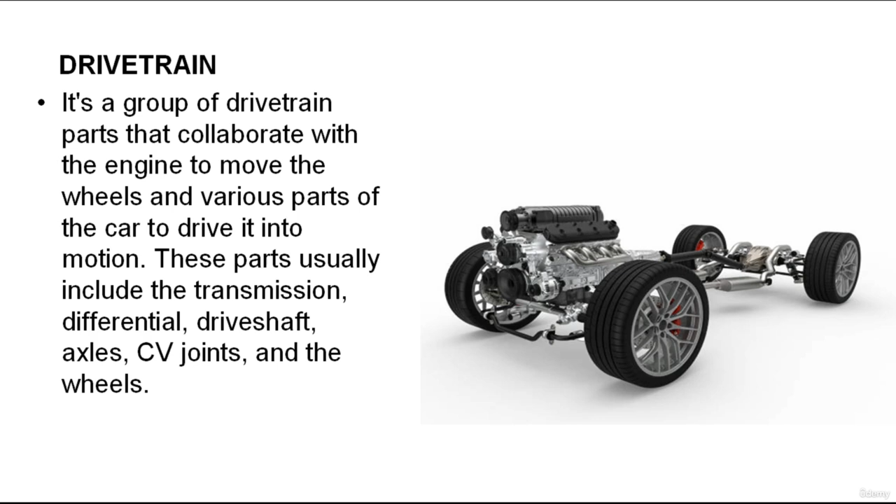Power flow in a rear-wheel drive vehicle passes through the clutch or torque converter, manual or automatic transmission, and the drive line. Then it goes through the rear differential and the rear driving axles and into the rear wheels.

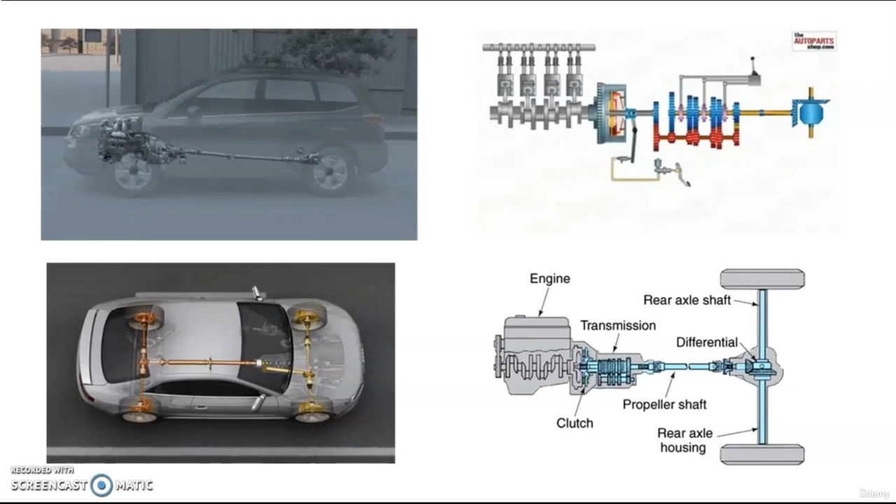Power flow through the drivetrain of front-wheel drive vehicles passes through the clutch or torque converter, then moves through a front differential, the driving axle, and into the front wheels.

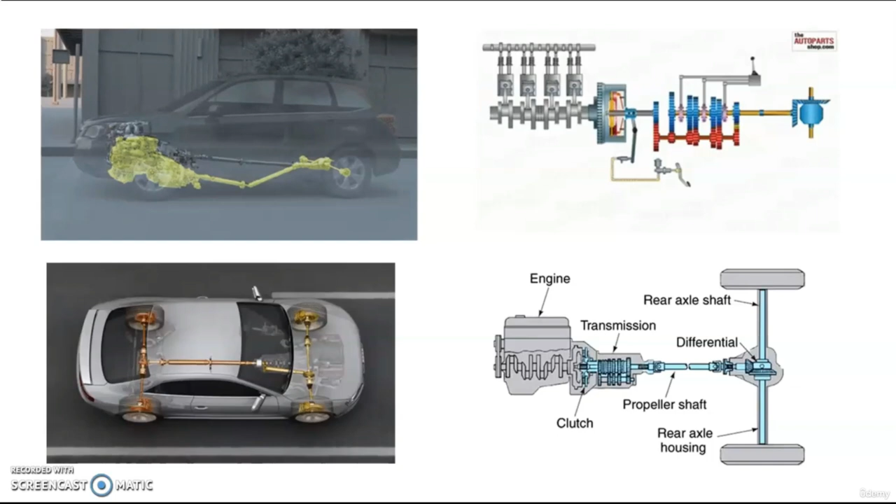Four-wheel drive or all-wheel drive vehicles combine features of both rear and front-wheel drive systems so that power can be delivered to all wheels, either on a permanent or on-demand basis.

Typically, if a truck, pickup, or SUV has four-wheel drive, the system is based on a rear-wheel drive and a front drive axle is added. When a car has all-wheel drive or four-wheel drive, the drivetrain is a modified front-wheel drive system. The modification includes a rear drive axle and an assembly that transfers some of the power to the rear axle.

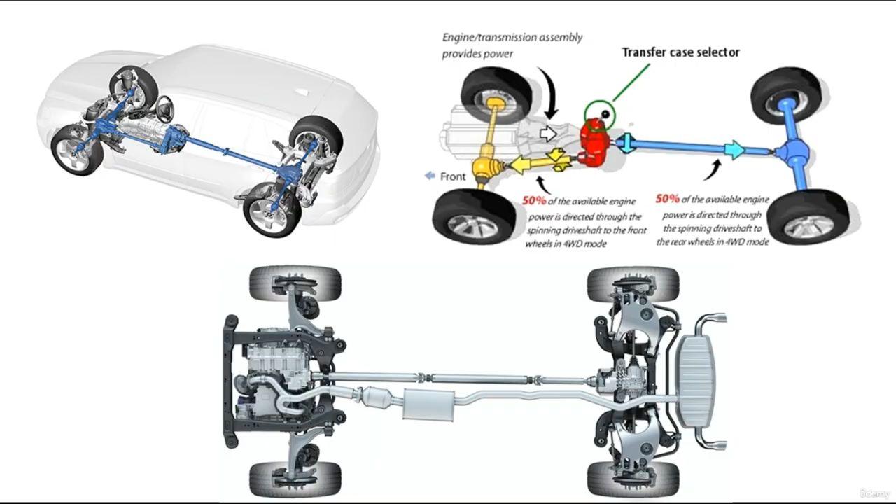We'll start with the first component, which is the clutch. The clutch is used with manual transmissions and transaxles. It mechanically connects the engine's flywheel to the transmission or transaxle input shaft. This is accomplished by a special friction plate that is splined to the input shaft of the transmission. When the clutch is engaged, the friction plate contacts the flywheel and transfers power to the input shaft.

When stopping, starting, and shifting from one gear to the next, the clutch is disengaged by pushing down on the clutch pedal. This moves the clutch plate away from the flywheel, stopping power flow to the transmission, and the driver can then shift gears without damaging the transmission or transaxle. Releasing the clutch pedal re-engages the clutch and allows power to flow from the engine to the transmission.

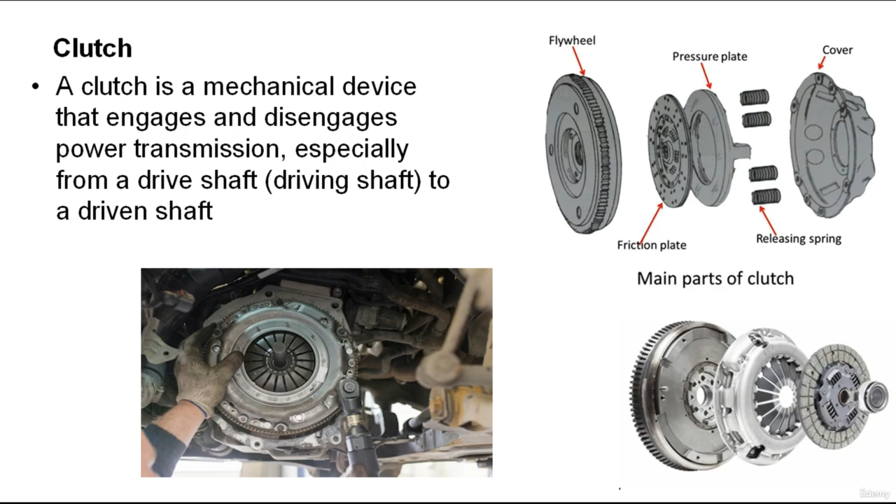And let's move to the manual transmission. A manual or standard transmission is one in which the driver manually selects the gear of choice. Proper gear selection allows for good drivability and requires some driver education.

Whenever two or more gears have their teeth meshed together, a gear set is formed. The movement of one gear in the set will cause the others to move. If any of the gears in the set are a different size than the others, the gears will move at different speeds. The size ratio of the gear set is called the gear ratio of that gear set.

A manual transmission houses a number of individual gear sets, which produce different gear ratios. The driver selects the desired operating gear or gear ratio. A typical manual transmission has 4 or 5 forward gear ratios, plus neutral and reverse.

Also, we have the automatic transmission. An automatic transmission doesn't need a clutch pedal and shifts through the forward gears without the control of the driver. Instead of a clutch, it uses a torque converter to transfer power from the engine's flywheel to the transmission input shaft. The torque converter allows for a smooth transfer of power at all engine speeds.

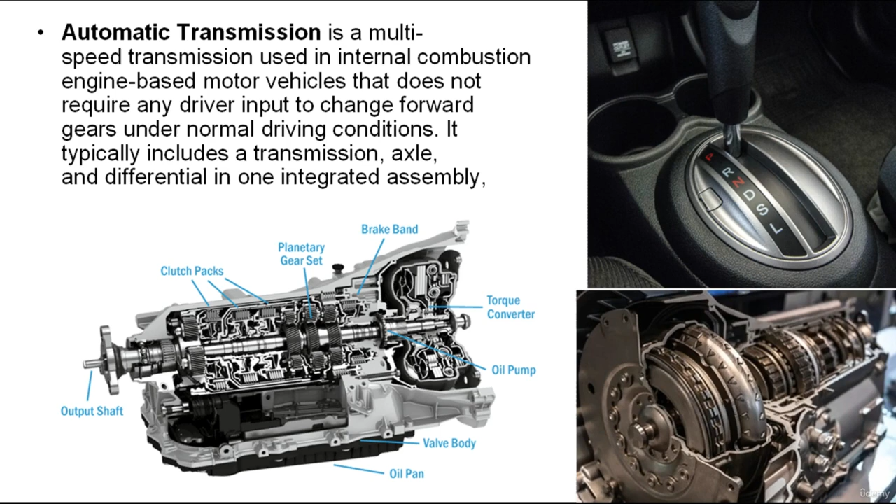Another part that we have is the drive line. Drive lines are used in rear-wheel drive vehicles and four-wheel drive vehicles. They connect the output shaft of the transmission to the gearing in the rear axle housing. They are also used to connect the output shaft to the front and rear axle drive on a four-wheel drive vehicle.

A drive line consists of a hollow drive or propeller shaft that is connected to the transmission and the drive axle differential by universal joints, or U-joints. These U-joints allow the drive shaft to move with the movement of the rear suspension, preventing damage to the shaft.

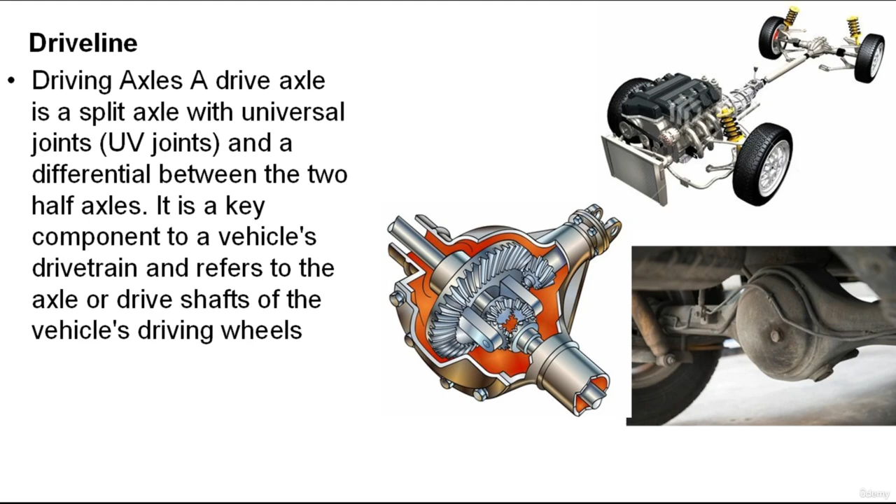Another part that we have is the differential. On rear-wheel drive vehicles, the drive shaft turns perpendicular to the forward motion of the vehicle. The differential gearing in the rear axle housing is designed to turn the direction of power so it can be used to drive the wheels of the vehicle. The power flows into the differential, where it changes direction, then flows to the rear axles and wheels.

The gearing in the differential also multiplies the torque it receives from the drive shaft by providing a final gear reduction. It also divides the torque between the left and right driving axles and wheels, so differential wheel speed is possible. This means one wheel can turn faster than the other when going around turns.

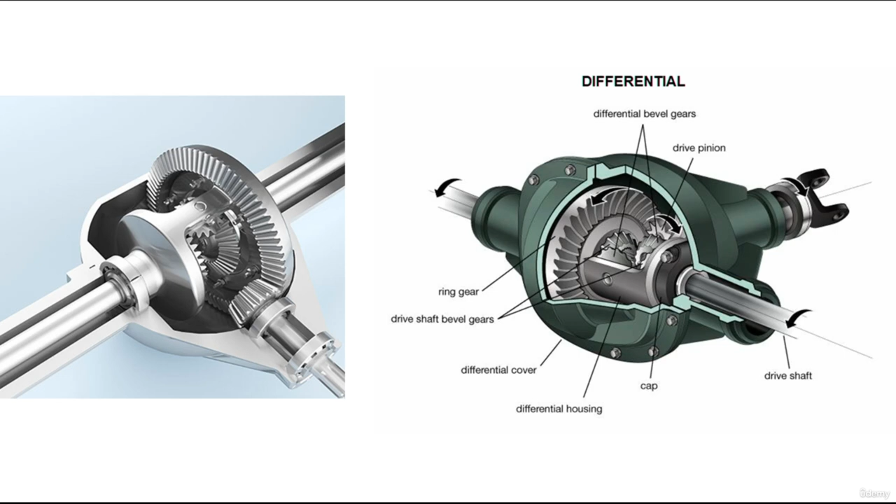Also, we have the driving axles. Driving axles are solid steel shafts that transfer the torque from the differential to the driving wheels. A separate axle shaft is used for each driving wheel in a rear-wheel drive vehicle. The driving axles are part of the differential and are enclosed in an axle housing that protects and supports these parts.

Some rear drive axle units are mounted to an independent suspension, and the drive axle assembly is similar to that of a front-wheel drive vehicle. Each drive axle is connected to the side gears in the differential. The inner ends of the axle are splined to fit into the side gears. As the side gears turn, the axle to which they are splined turns at the same speed.

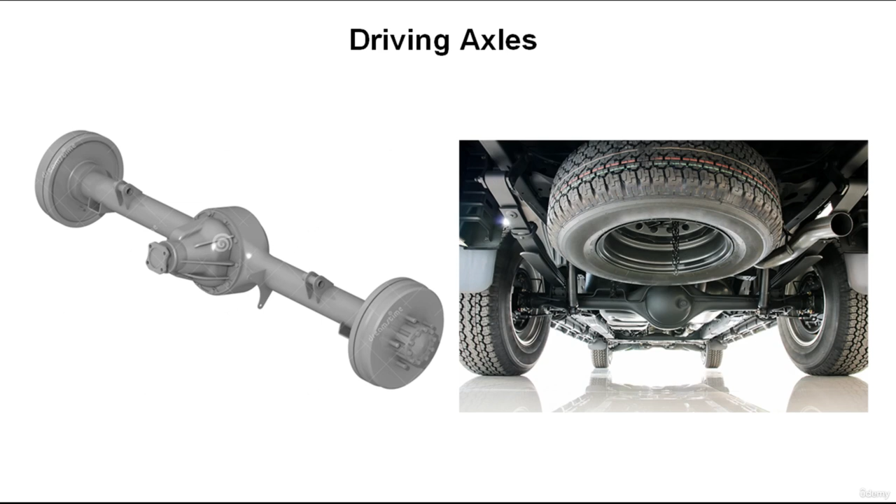The drive wheels are attached to the outer ends of the axle. The outer end of each axle has a flange mounted to it. A flange is a rim for attaching one part to another part. The flange, fitted with studs at the end of an axle, holds the wheel in place.

Studs are threaded shafts resembling bolts without heads. One end of the stud is screwed or pressed into the flange. The wheel fits over the studs, and a nut, called the lug nut, is tightened over the open end of the stud. This holds the wheel in place.

The differential carrier supports the inner end of each axle. A bearing inside the axle housing supports the outer end of the axle shaft. This bearing, called the axle bearing, allows the axle to rotate smoothly inside the axle housing.

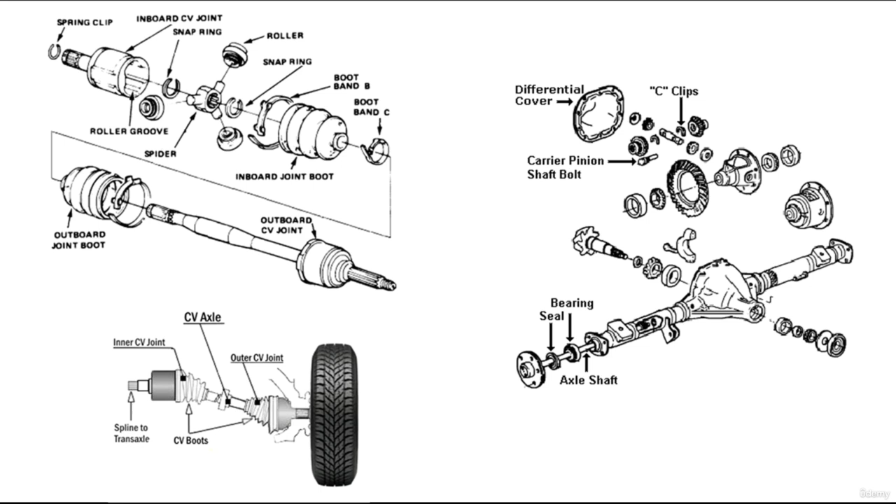Also, we have the transaxle. A transaxle is used in front-wheel drive vehicles. It's made up of a transmission and differential housed in a single unit. The gear set in the transaxle provides the required gear ratios and directs the power flow into the differential. The differential gearing provides the final gear reduction and splits the power flow between the left and right drive axles.

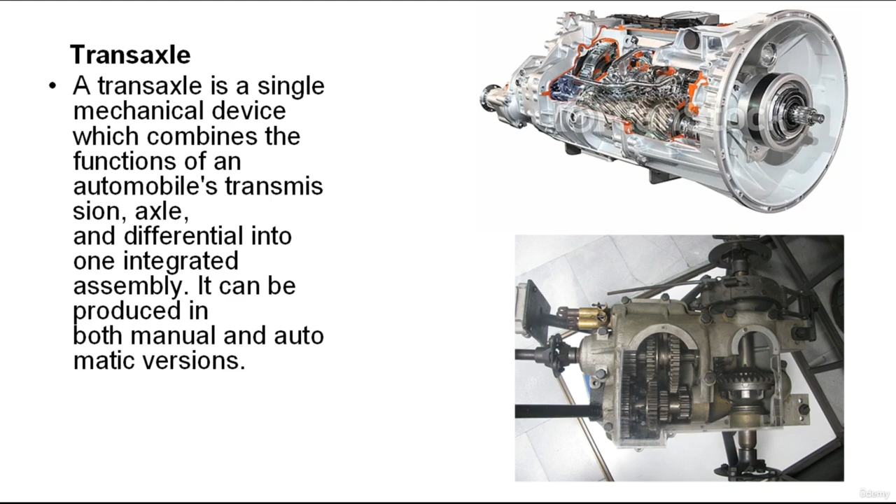The drive axles extend from the sides of the transaxles. The outer ends of the axles are fitted to the hubs of the drive wheels. Constant velocity, or CV joints, mounted on each end of the drive axles allow for changes in length and angle without affecting the power flow to the wheels.

Also, we have the four-wheel drive system. A four-wheel drive system or all-wheel drive vehicle combines the features of a rear-wheel drive transmission and front-wheel drive transaxle. Additional transfer case gearing splits the power flow between a differential driving the front wheels and a rear differential that drives the rear wheels. This transfer case can be a housing bolted directly to the transmission, or it can be a separate housing mounted somewhere in the drive line.

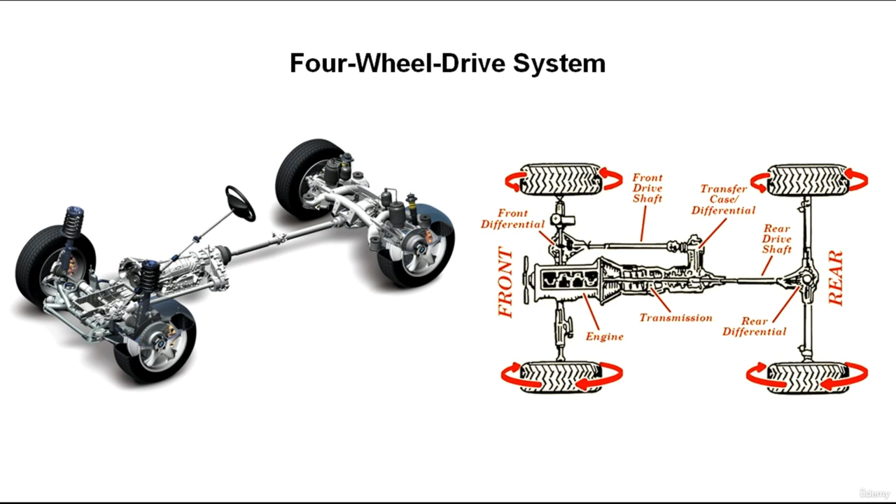Most rear-wheel drive-based four-wheel drive vehicles have a drive shaft connecting the output of the transfer case to the rear axle, and another connecting the output of the transfer case to the front drive axle. Typically, all-wheel drive cars have a center differential which splits the torque between the front and rear drive axles.